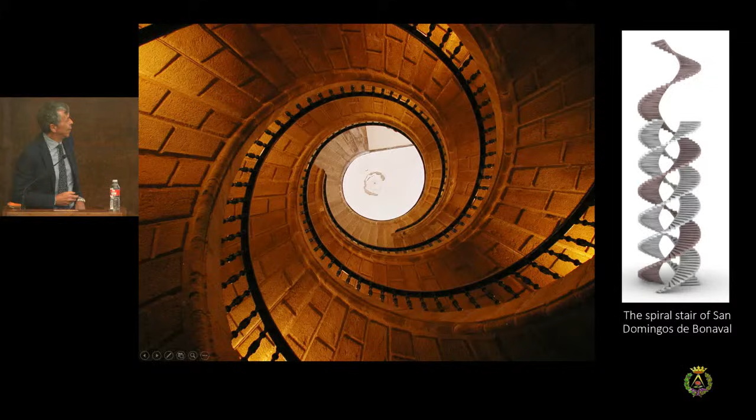This is an example that was brought to my attention by Santiago when we first met in this meeting in 2013. With this very generous style that everybody knows, he shared his ideas and expertise on this stair. This is the stair of San Domingos de Bonaval, a three-coil stair made of monolithic treads of granite, touching only at the inside. This is an open well stair, built into the wall, and the pieces touch only at this kind of rib.

This is Santiago in Anagni when we talked about this. After that, a group of people took this problem as a challenge. I had to admit, at that time I was an expert, a professor of structural mechanics, but none of the models I used could explain the equilibrium of this stair. This was taken up by many friends and scientists who applied different methods: 1D continuum models, funicular things, discrete elements, kinematics, equilibrium, and especially the last one combines all these methods.

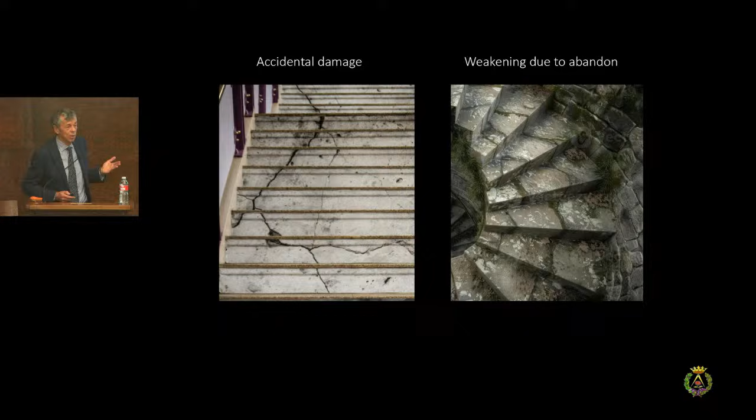Of course, sometimes these stairs can show signs of discomfort, because maybe they are abandoned or damaged by something falling. In that case, you have to do something. But if there is no such problem, there is no reason to intervene. These are two examples of overreaction, something that was done, I think unnecessarily, just because they didn't know how to explain it with their models.

The model I used to compute this stair very easily is based on the work of Heyman, on the model of Heyman. Actually, the book of Heyman from '95 changed my life, because in my first life I was kind of a mathematician, and I worked on this unilateral model, which I think is the only good one for masonry, but from the mathematical point of view, with mathematicians, also with the Neapolitan school, Di Pasquale, Mario Como, who is here. But I discovered this can be useful for the real world.

And the model is very simple: there is no tensile stress, the stones interact only by contact, there is no tensile stress, and very important, there is no sliding. The intuition of Jacques Heyman was that you can use limit analysis for this kind of model.

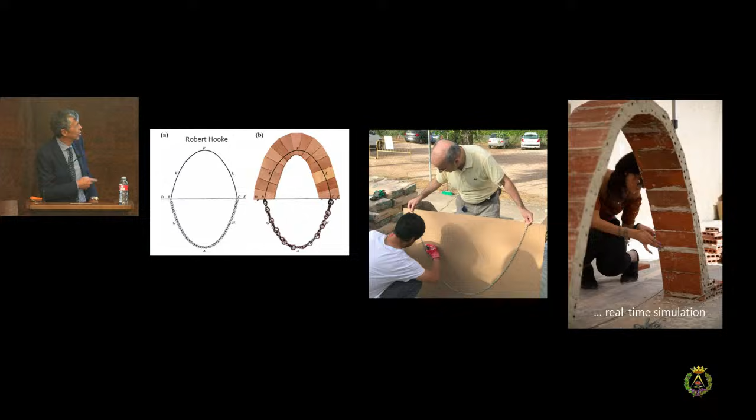The simplest example where you can see the theory of Heyman at work is this arch. If you take a chain, the equilibrium of this chain is ruled by the same kind of equilibrium as an arch, so you just have to invert it. This intuition gives you the possibility to make real-time simulations of an arch. This is the summer school we have organized since 2018, where we also build something — here a student is building an arch based on this model.

No? You can approach this with graphical statics. This was the old way in which they used to assess masonry structure, so with a discrete approach. But you can also use a continuum approach.

That is the famous catenary equation. You describe this curve as a function of x. And yes, I use f instead of y, but it is just because I'm a mathematician. And the equation is very easy. The thrust times the second derivative of the shape, second derivative is the curvature, is equal to the load. This load is defined per projection.

And if you try to write that with the length, you have a square root, but if you have the load that is defined per projection, this is very easy, it is a constant. So you can use also the continuum. I prefer the continuum.

And you will see that there are two models in which you can explain the equilibrium of the stair. And the first approach is discrete. I mean, you can think of the stair as made of many pieces. And the first solution is a solution proposed by Heyman. And actually, I've seen the proofs of this new edition of the book, and there is also this analysis.

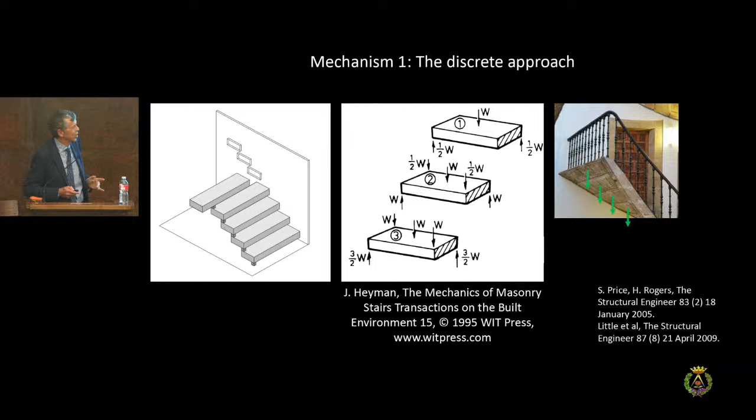There are also some other papers quoted there by English engineers that understand what these stairs are. And the idea is very simple: each step, say step n, takes all the load coming from the above part of the stair, and then there is the weight of the step. And these forces you have to balance.

So the balance is made like this. You can balance through the beam, that is the step, the load with these two forces. And then you can balance with another force that is opposite to the blue force. So this is a way that you can make equilibrium.

Of course, you create a moment. This moment must be taken by the socket. So the socket cannot rotate, so it can take that moment. And so you can compute the moment. This moment is just the load times the length of the step.

What is the problem? When you go down, this moment grows, because all the weight above grows linearly. So at some point Jacques Heyman said that you cannot bear the shear stresses that you have after maybe 20 or 30 steps. It depends on the loads, it depends on the material, and so on.

This is the typical step. This is the same picture. And this is the relation. The moment is the load that is transferred to the rib, that is 1/2 of W in this case, because the step is rectangular. And then you have to multiply for all the steps that are above, that are n-1. And then there is the moment, that is the force times the distance. So it is quite easy.

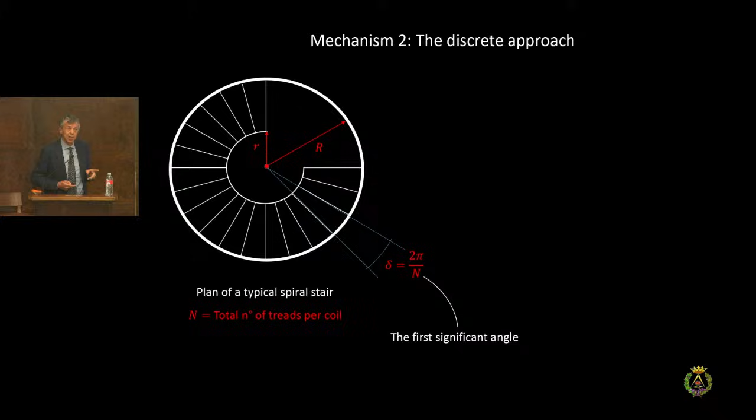And the first angle is the step angle. That is the whole 2 pi divided by the number of steps. Here there are 42 steps for each coil and a total of 126 in the 3 coils. So this is the first angle.

So what can you do? You do the same you did before. You transfer the load at the wall, at the rib let's say, and you take the force at the wall with the wall. And the other one you can think you can take with this kind of rib. So you have this strut made of three bars. They are in space, so they are numbered. 1, 2 is the rib, and 3 is the force inside the rib, inside the tread.

So what you do to handle this kind of 3D strange equilibrium, the mantra is working with the projection. It was invented by Maxwell, maybe, or Rankine, I don't know, and also John and Philip developed a method called TNA, Thrust Network Analysis, that is based on working on the projection and on the duality between the form and force diagram.

Okay, so this is the view from top, and then you have these 3 bars, and you have the forces. For those who know this play of form and force diagrams, this is quite easy. I will not go into details because we have no time to explain this, but it's kind of easy.

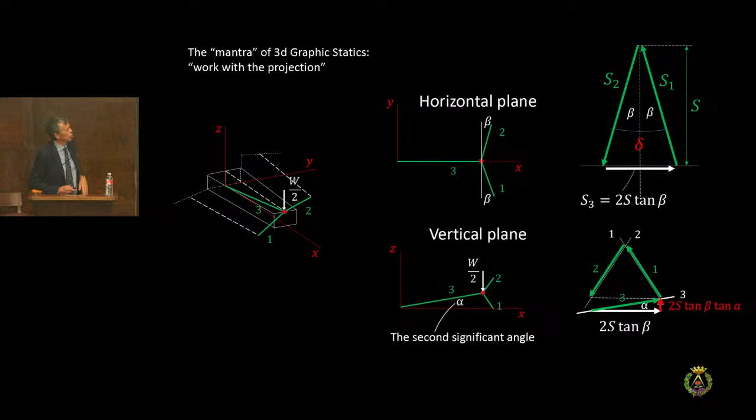And then you go in the vertical plane, and working in the vertical plane, you put the force there. That is the force, the weight of the step. And then you can do equilibrium. You know the direction of it, so you do this. This is kind of standard, no?

And then what you get? In the end, you get that you want to close this polygon. And then to close the polygon, you have to amplify the S until everything is closed. And in the end, what you discover is that S is the projection of the axial force into the rib.

And this is the weight of the tread divided by this strange thing. This can be easier because delta and alpha are small angles, so you can write this way. You can say that tangent alpha is alpha. You can say that tangent delta over 2 is delta over 2.

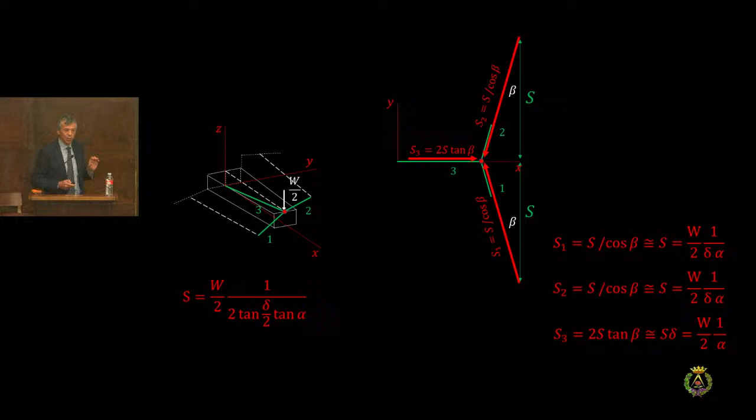And in the end, you just get that S is... here is S1 and S2. S1 and S2 are the vertical component, the Y component of the forces into the rib. These are W divided by 2, that is the force transferred to the rib by the step, divided by delta and divided by alpha. So they can be not so small, no?

Because delta and alpha can be 0.1 or something 0.15, it depends. So it is quite high, but it's not so high. And we will make the number.

So, of course, the second mechanism is... yes, I did something different here because, you know, W over 2 is the weight that the step transferred to the rib. But if you have a different step, you maybe have a different value. You call this value QB, that is just the force that is transferred to the rib. And so I use this relation instead of the first one because we will use that for our case.

And what is the problem with the second mechanism? The second mechanism works with this constant force into the rib, and this goes all the way to the top. And sometimes at the top you don't have any possibility to balance this force, no? This constant force, it's like a thrust. It's a strange thrust, because usually when you have the thrust, at the end, the slope is opposite, so they cancel. They sum up.

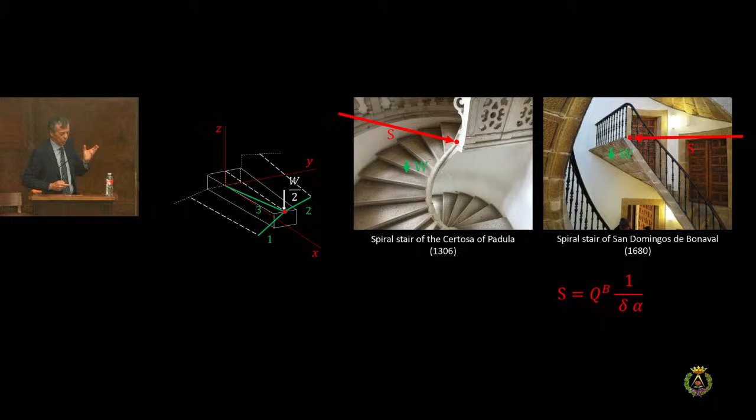They don't cancel. So in the end, you have to come up with something that combines mechanism 1 and mechanism 2. And I will do this with continuum. So I brought some props in such a way that it is easier to understand what I will do. It is very easy. Of course, we don't have time to go into details, but it's quite easy to work with continuum. What is our continuum?

It is a very strange rib, because we have a rib there. This is a physical rib. And this, I call it a non-standard beam, because it is a beam with no moments. If you have a beam, the beam is defined by the fact that it is one-dimensional and can transmit bending.

And this, in fact, it is not like this. It's more like this one, because it cannot only transfer — of course, you have to change the sign — no? You can only pull this, and this one can only be compressed. But what is the difference? That there are these moments of the steps.

So when you write the equations, many times they say don't write equations, but these equations are very, very simple. So you describe, think that the rib is straight, because this fact does not depend on the fact that the rib is curved in the horizontal plane.

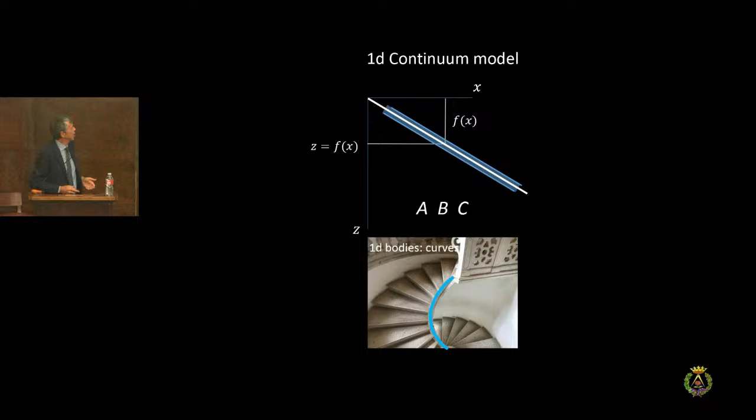Take the rib, describe it the same way as the catenary. You see that the rib can be curved, but now we think that it's straight. And then you assume that it can take these forces: vertical forces, horizontal forces, and moments. These moments come from the step, because the step cannot rotate. These are the external forces. Then you have internal forces. If you have a beam, you can have 3 internal forces: horizontal, vertical, and a moment.

When you do beam theory, you decompose the forces into axial and transverse. You have the shear, but here it's better to decompose them horizontally and vertically. Next you have to define your equations. These are the standard equations of a beam, which we teach in the first year of engineering, and architecture also. You take a piece and make the balance of the forces, and you come up with these equations. You cannot see the equations right now—maybe it is done by Santiago.

You make equations. Okay, tell me when my time is over. I'm almost there, okay. So,

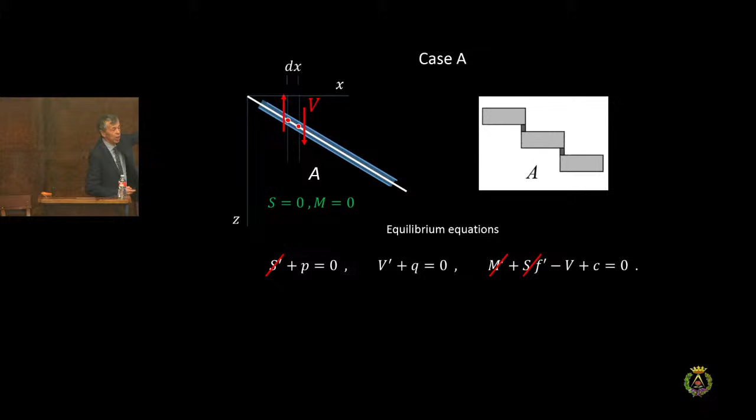this is the balance of the horizontal forces, this is the balance of the vertical forces, this is the force coming from the step, and this is the balance of moments. What is the problem? This beam does not carry moments, and neither horizontal forces if the connection is like that. So you have to cancel those, and you come up with equations that are quite easy.

And then you can compute this moment. This small c is the distributed moment along the rib, so if you want to compute the resultant, you have to multiply by the length of the step, of course. But anyway, you compute it this way, and you see that the formula, when the load is constant, is linear. This gives you the idea of Heyman's linear growth. This is the same as Heyman, but done with the continuum.

And then you take the other case, the case of contact, where you can transfer through friction, or with a rebate it's much better, you can transmit a force that is axial. How do you understand that it's axial? You write the same equation and say that m is 0. Of course, s must be negative, because you have only compression. So you have to cancel this.

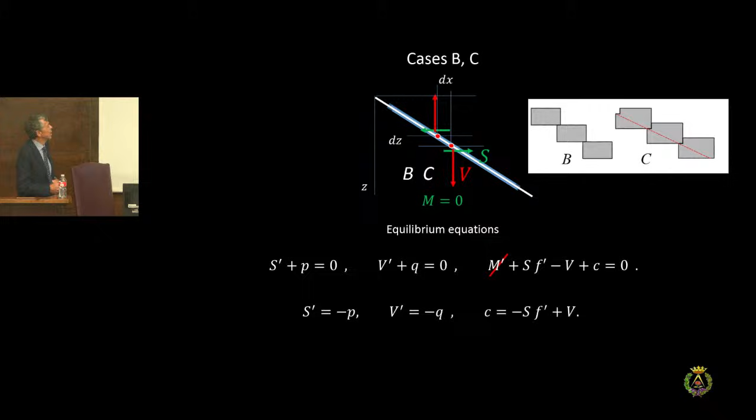If you want to study the solution not of Heyman's but of pure compression, you exclude the c, so you come up with this equation. You discover that the vertical force is connected to the horizontal. And so you construct the equation the same way as the catenary equation. You have this equation, and this term, in this case, should be 0, because you see this is straight, so the second derivative is 0. So you go on,

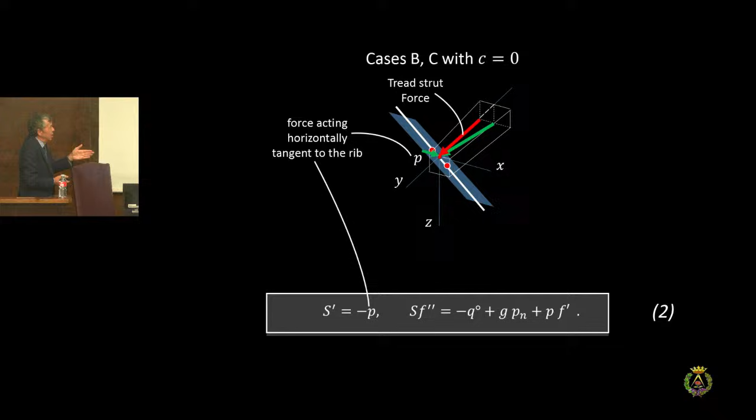you want to take that force with the strut element. You have a vertical component. This vertical component has to balance the load that is transferred to the rib. This is an effect that comes when you have a horizontal also—sometimes you don't have the horizontal, only vertical. This you have to cancel because this is straight. There is also this force that is important: an horizontal force that gives you the possibility to change S, not to have an S that is constant. The problem was that the S cannot go all the way to the top because there is nothing. So if you want it to vary, you have to assume there is this small p, meaning the strut element is a little tilted.

So you need this, of course. Then you have to check at the end. And the final thing is to understand that if you want to balance this force coming from the step, you need something curved. So you have to assume that the rib is curved. And when the rib is curved, the equilibrium of this force is made with,

yes, this equation—it is very similar to the catenary equation. It says that the load you put transverse to this rib in the plane is balanced by the product of the curvature, rho, 1 over r in this case, times the stress in the rib, the projected stress. So you have 3 equations: the first 2 are the same that we wrote for the straight rib. This derivative is the derivative with respect to S, the length along the rib, and this is the other equation. So in 3D, you need to balance transversely.

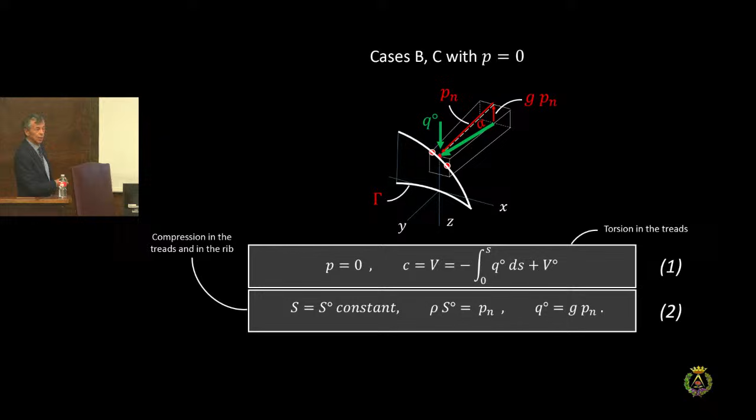And then, of course, you want to recover what you did with the constant. You can do this very fast. You can check the case in which the horizontal load P is 0, in which case you get constant S—that is the thing you didn't want, but just to check. And then you compare the solutions with those of the discrete case, and they are, of course, the same.

It's the translation of this equation into continuous terms. But to combine them it's better to work with the continuum. So I combine them, using this equation, and you see that here there can be a combination of moment, of this C moment, and of the thrust in the rib, compression and torsion. You can combine them linearly as you wish.

And you can think that the load that goes to the rib is decomposed into two parts. One part goes to the torsion, and the other one goes to the compression. These are called Q1 and Q2.

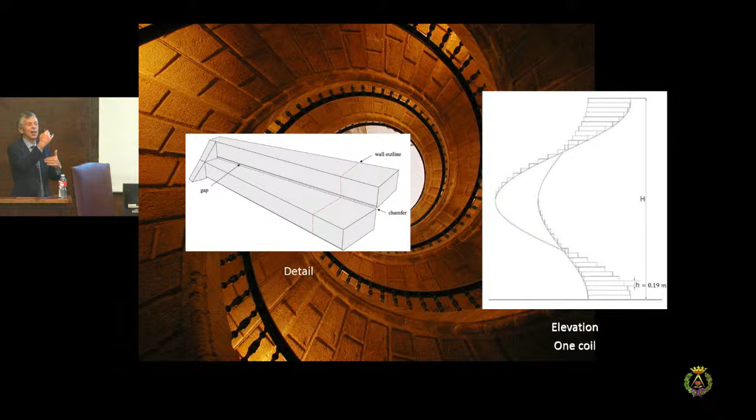And then we study finally the stair. This is the stair. You see that there is a gap, and at the corner there is a chamfer. This is the detail of the stair. And this is one coil. The height of the step is 0.19—there was a reason, because there are 3 coils, and you need some height, otherwise you don't get there.

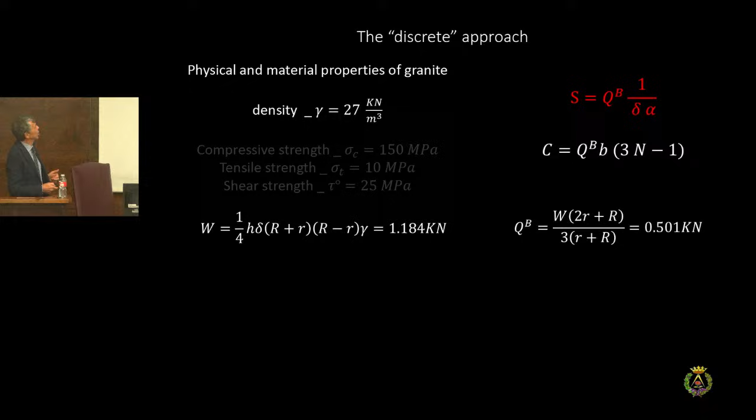So now we have the two solutions, and we can combine them. First, I want to skip this because this is the constant solution—we don't want to see the constant solution, we want to see directly the combined solution.

So you take your rib, you can develop it in a plane. So this is the description of the rib. These are the dimensions, the real dimensions. 3h is the total height, 3 capital H is the total, 24 meters. And you need these numbers to put in your equations.

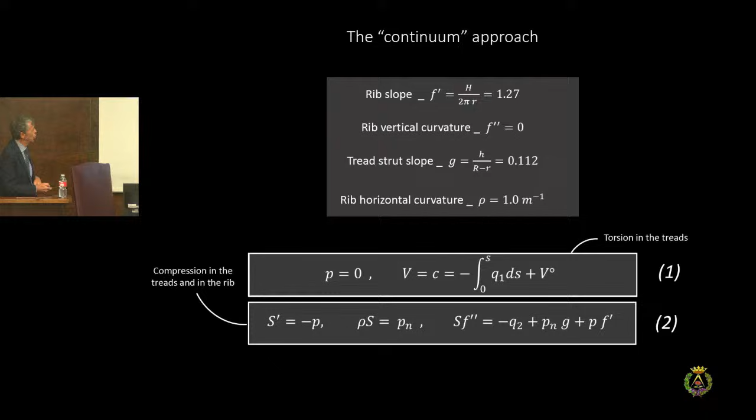Then you take the two equations, using the pure Heyman solution and the pure compression solution. And how do you combine them? Of course, here are the boundary conditions—we like to write the boundary conditions. The boundary conditions are that at the top, the force is 0.

And then to find S, you have to solve this very easy ordinary differential equation. Instead, the value of C and of V is explicit—it's just the sum, it's just the same formula of Heyman. So this one is not explicit, but you can solve it, and the solution is analytic. So it is general, you can solve it anyway.

So how can you distribute? The most sensible way is to distribute with an exponential. So you start with everything in torsion, and then at some point it all becomes compression. You need this because you don't want the P force to change from the beginning—that's not good. So by changing the exponent in this formula, you get different transitions, and this is the transition that I chose. If you take k equal 0, you get the solution of Heyman. If you take k equal 2, you have a drop of 5 times the moment, and this is the one we use. This is done step by step.

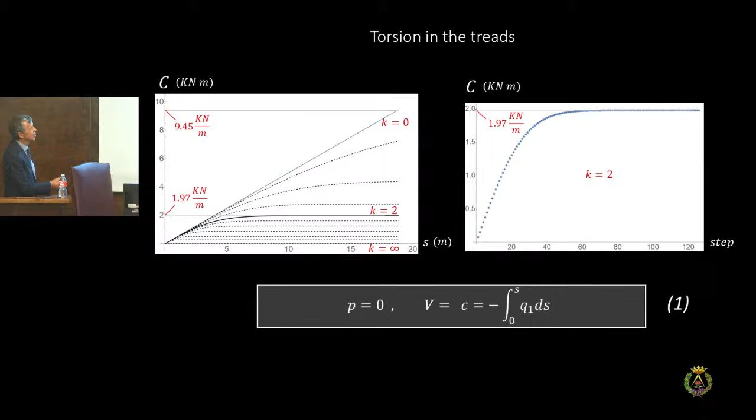It's the moment step by step. So you can compute the force at the moment. You can compute the tangential stress, the shear stress, and this stress is very low compared to the limit.

You can say, well, but there could be live load. Okay, but you have to multiply by 1 times 2, maybe 1 times 1.1, 1.2, and it is still below the limit. And what about the force into the rib, the S force?

The S force, of course, also this can be different depending on the choice of this exponent, but with k equal 2 you get this one. So this is the profile of your axial stress. It starts from 0 that you want, and then it gets to this value that is the maximum. So you take the maximum and you try to compute the stress.

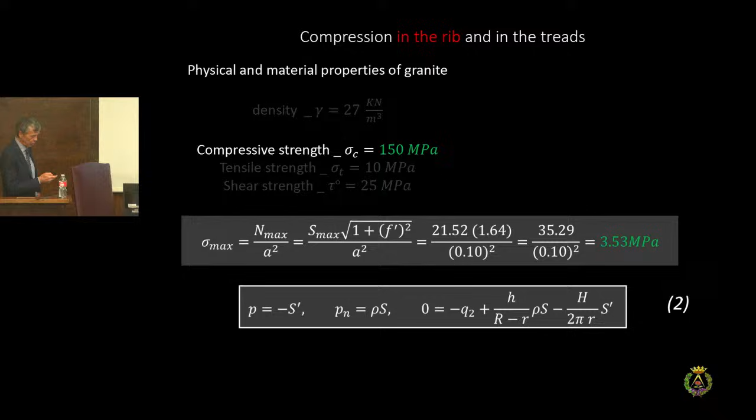This is very, very, very low, no? 3.53. And okay, of course, this is the part that forces us to be careful, because you don't want to have this small p from the beginning.

And actually, with k equal 2, you have the maximum of this that is at the 40.

I'm over, no? It's over. The time is over. Oh, okay. Good. I ran too much.

I can relax. Okay. And so the maximum of this force, this is the force, T means tangential. And I'm sorry that I changed the name, because this Sn, it was called S3, it was the force into the strut, into the step. To the N, because it's normal to the rib. This is tangent to the rib. This you want it, this is nice.

This is not nice. If you change the value of K, you get this, for example, no? You get, it is not very large, this P, no? The effect of 36 kilograms, okay, but it is something, no?

If you have the maximum in 10 steps, you don't like it. If it is 48, it can be taken by the stair. So this is the idea.

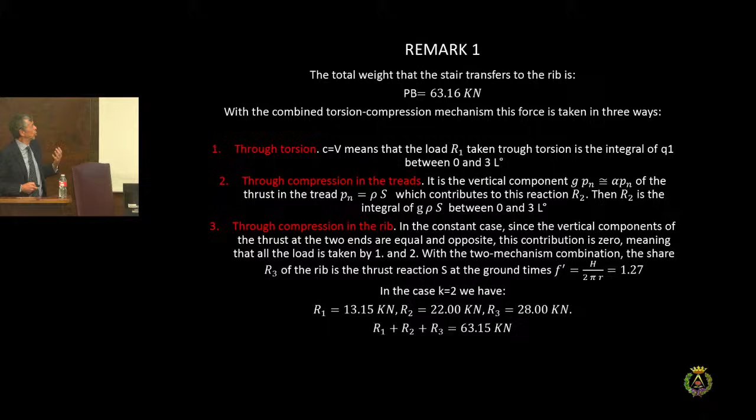Of course, there is a remark on the live load. You can put, sometimes they ask you to change destination. You have to put a very large load. And if you put the usual load that they put on a stair, that is this one, you have just to amplify, to multiply your result by 2.10, and it's still below the limits.

Yes, this tau max remains below the limits. It is close to the limits, but it's below the limit.

And these are the final conclusion, because there is always this question: we found a regime for the stair that was good, but why the stair should take it? The reason is the safety or mobility analysis. And in this case, you know, it's due to some effects that sometimes you don't consider.

The fact that the part that is built into the wall is not perfect. It can move. It can give a little. It is not stiff. And so the first message is do not stiffen. Because if you stiffen, it is worse. Because if it is not stiffened, it can go to this state.

The important part is that you find this state, and the stair will go to this state in a kind of ductile way.

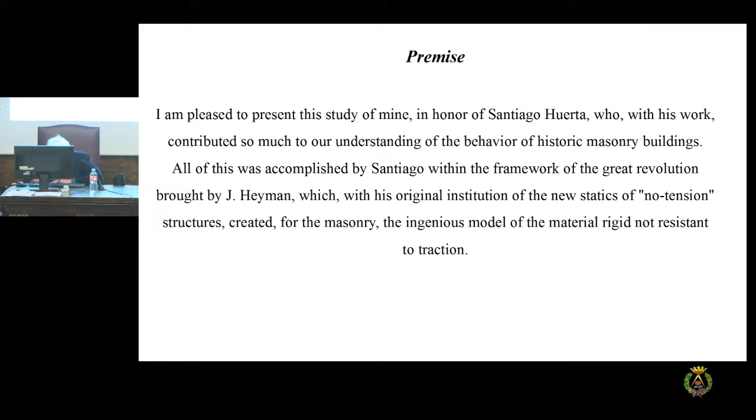The work I present here, which for the most part built on some previous studies on the topic conducted by myself and my young colleagues, Coccia and Di Carlo of University of Tor Vergata, moves within this context and concerns the extension from the statics to the seismic dynamics of this new modeling of the behavior of masonry construction.

The need for a theory of seismic dynamics of masonry structures is clearly acute. Currently, in technical practice, only procedures based on criteria generally used for reinforced concrete structures are applied. The same characterization of the dynamic collapse, which presents completely different aspects from those relating to the static collapse, has not yet been defined.

The aim of this work is, first of all, the formulation in the context of the Heyman model of the concept of dynamic collapse, together with the research of resistance required by masonry structures to support the expected seismic action.

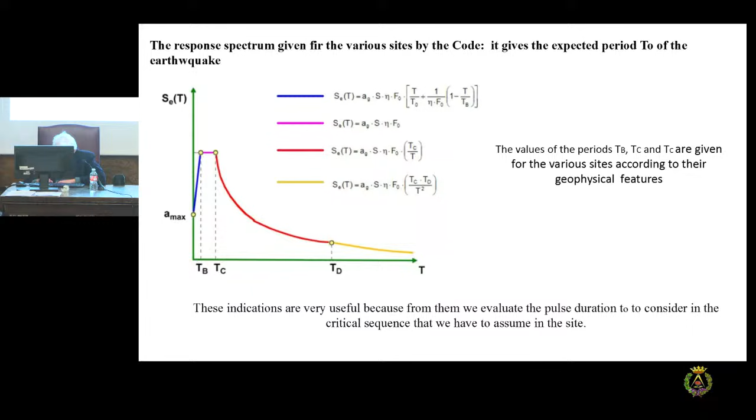What essential aspects do we have to take into account to study the seismic response of no-tension structures? Two important things: the weight, together with the geometry, constitute the resistant resource of the masonry structures.

The rigid prismatic column rocking on a rigid plane with friction represents the archetype of masonry no-tension structures. The alternating detachment of the column from its base simulates the rocking of masonry structures, following in the oscillation the opening and closing of the cracks. We see the movement according to the no-tension theory in the plane of the structures.

An important remark: if we consider, for sake of simplicity, the oscillation of the column, but also the oscillation of an arch in its plane, we recognize that there does not exist a proper period of oscillation for no-tension structures. Why? Because the impact that occurs during any inversion of the motion spends energy. In a simple oscillation, we see that the period changes rapidly, and no fixed period exists. This means that the whole framework of the response spectrum cannot apply to study the seismic response of no-tension structures.

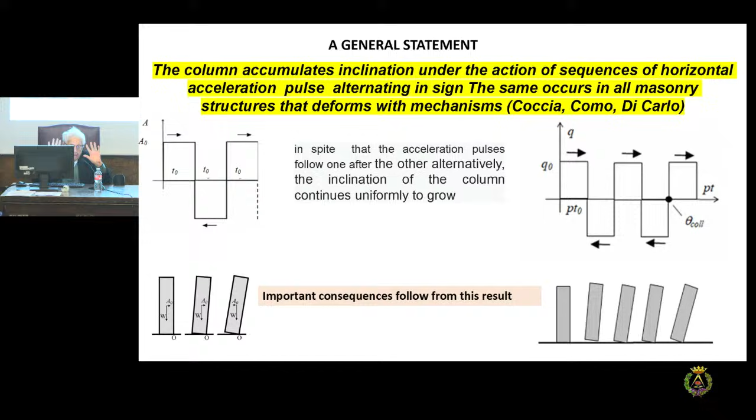This effect increases when considering a sequence with a greater number of pulses. This applies not just to the column but to any structure that moves sideways without going back, without impact. What happens therefore? First of all, we asked ourselves whether these results that I explained to you are correct.

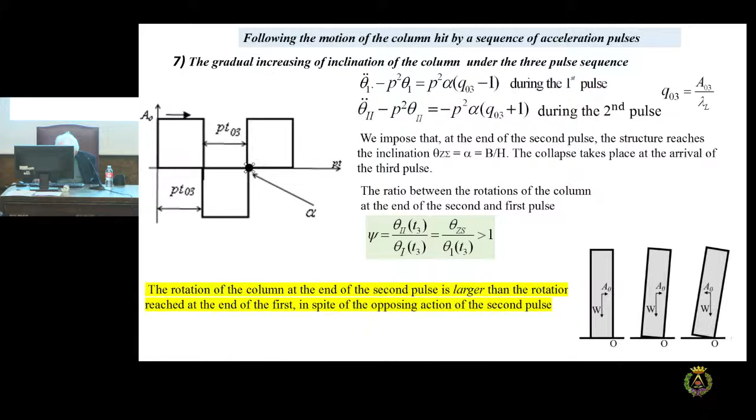Considering the sequence, we recognize that as the number of pulses increases, the Q factor, the limit collapse factor, becomes smaller.

What do we have to do? We have to look for the minimum, the smaller values of the Q factor able to destroy the structures. And we can do that.

We can at the same time represent the Q factor as a function of the interval of the pulse, and we obtain the limit curve. By increasing the number of pulses, the limit curve becomes nearer and nearer to the others, so that we can define an asymptotic curve on which all the various curves accumulate.

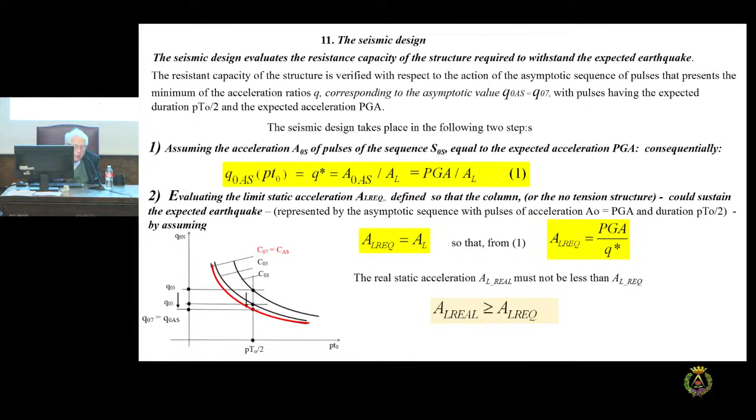With the experimental numerical test, we see that after just a few impulses, seven pulses, you reach more or less the asymptotic curve. According to that, we can immediately obtain the main result: the static limit strength required for the structure, so that if hit by the sequence corresponding to the minimum intensity of the Q ratio, which is the most destructive property of the sequence, the structure must be able to support this action.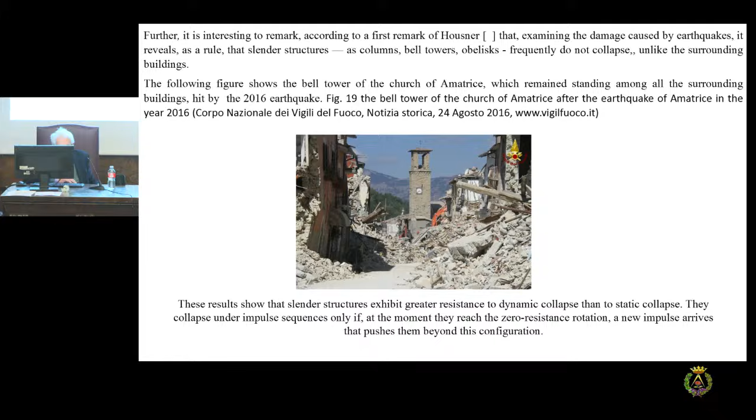I want only to say there is the bibliography, with 3-4 papers of mine and my young colleague that have been published on earthquake engineering, reporting some of the things I have explained to you, together with an application to walls and forces orthogonal to their plane. That is one of the more important problems for the defense of masonry construction during an earthquake. We have to remember the destruction of Messina—the famous street, I don't remember the name—in which all the walls of buildings collapsed outward, and also the application to the masonry arch, hit by horizontal pulse in the plane of the arch. Okay? Okay.

Thank you, Professor. Thank you. And I'm... excuse me, take a minute.

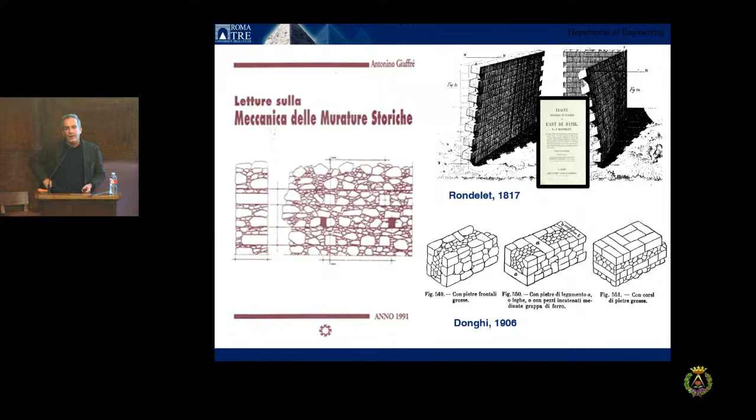In particular, his great contribution was to clearly outline the importance of the quality of masonry construction, and how the effective capacity of masonry structures under lateral loads decreases with decreasing level of bonding between the two leaves of the masonry structure.

This aspect had a very strong influence on earthquake engineering of historic structures, as we can also see from many earthquakes, because often what happens is that the wall is damaged after disaggregation of the external leaf, which detaches from the inner side of the wall and fails outward. This is one of the reasons for the tremendous level of damage that happened after many earthquakes, such as the Amatrice earthquake in 2016, but not only in Italy—also in other historical contexts like Antakya in Turkey in the 2023 earthquake.

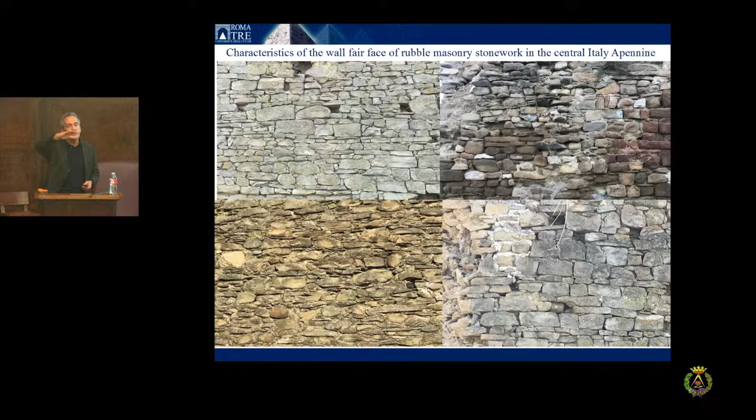One of the difficulties in studying this very dramatic behavior of masonry structure is to understand and read the quality of masonry, because sometimes from the external leaf you don't understand that the quality is so poor. You see horizontal tiers, the blocks put in a reasonable manner, but when you see what happened after the earthquake, you understand clearly that the internal structure is very poor, and the wall is lacking bonding elements between the different leaves.

What we have done in this context was possible thanks to the availability of the municipality of Accumoli, one of the municipalities struck by the earthquake in 2016, which allowed us to take the stones from a building that collapsed after the earthquake and use them to build a full-scale model to test on a shaking table.

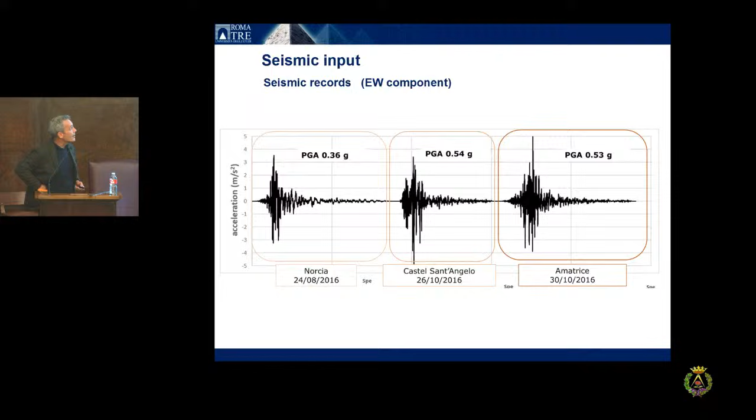To this end, we designed a steel frame to allow the upper part of the wall to move in the same manner as the base of the wall under the shaking table. We tested the behavior of this wall with some real earthquakes taken from the registration of the national accelerometric network. These are the three earthquakes we applied to the shaking table, applying them at subsequent increasing levels of acceleration up to the complete failure of the specimen.

I don't know how to enter this. I think we cannot see the failure video, unfortunately. I don't know why.

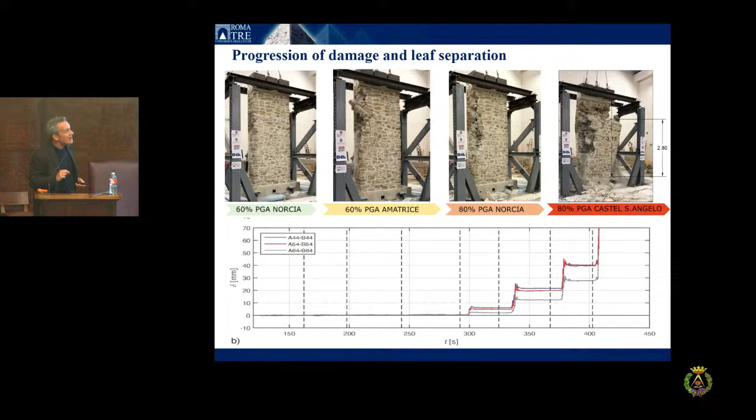The reproduction of this failure was very interesting to understand better the behavior of historic buildings, and to understand how important the progressive separation between the leaves is, and when this detachment becomes so high that the stability of the wall is no longer guaranteed, helping us understand the progression of damage up to the out-of-plane capacity of the masonry wall.

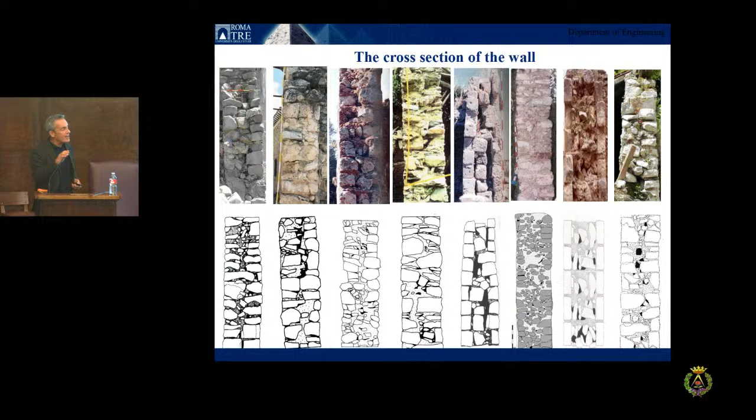Starting from this activity, we tried to expand this research to other wall sections taken from different surveys, analyzing their behavior under both static and dynamic loading, and coming up with an overall behavior of the wall depending on its internal morphology. This outlines the differences between the classical rigid body out-of-plane overturning presented by Professor Como in his talk, and the effective wall section made of stones interacting in different leaves. This was the starting point of further research devoted to understanding the detachment of this wall close to the corner.

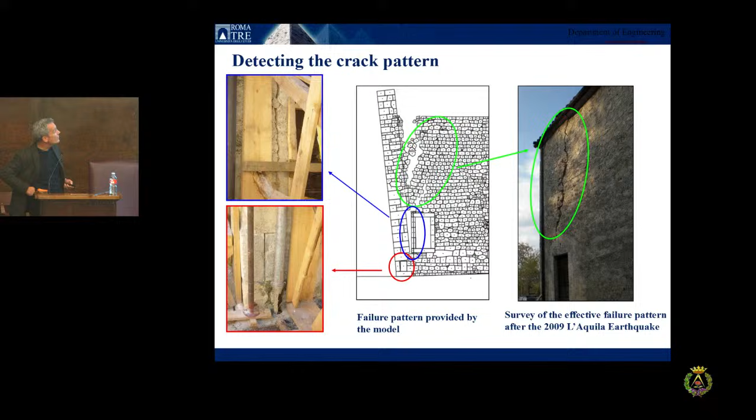Starting by modeling this—it's not working, this one, no, okay, it's not a problem—we also verified the effective capacity of this tool to reproduce the effective failure of masonry structure hit by earthquake.

This becomes a very interesting tool, especially combined with digital survey: you digitally survey the face of masonry, recognize the important texture of blocks, such as those shown in red in the slide, which are important in terms of stability, while reproducing the other blocks in a more rough manner, then simulate the effective behavior under earthquake. Unfortunately the video is not working, but this simulates the effective detachment of the wall from the rest of the structure, allowing us to analyze the effective seismic capacity of these buildings.

From this activity, our current challenge is to do this automatically, starting from the digital survey of the building, then identifying the joints of the masonry structure through a marker-based watershed segmentation—an automatic algorithm that rebuilds the effective pattern of block masonry—and then performing structural analysis depending on the morphology of the block section to get a final estimate of the earthquake capacity of the structure. This is one of our current research activities, always brought together with great interest and passion for monuments, as we are effectively involved in many structural assessments of existing structures. Thank you very much for your attention.

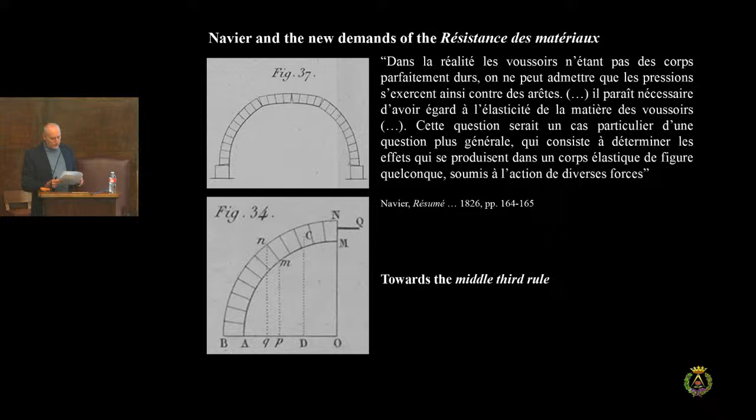As mentioned above, Saint-Venant adopted Navier's discussion. However, Navier's two-sided analysis must have seemed very confusing and unsatisfactory to him. The winning approach for overcoming this uncertain and confusing situation was found by Saint-Venant in the contents of a note, sur l'équilibre des voûtes en berceau, that Méry sent him in December 1837, probably at Saint-Venant's request.

Like Navier, Méry develops the theory of vaults from two distinct points of view. The first is the traditional collapse analysis, which, in Méry's words, concerns the so-called équilibre mathématique in the case of infinite compressive strength. In this sense, nothing really new, except for the use of an innovative graphical tool, the line of thrust, to replace the cumbersome analytical methods used until then. Here we find an example of équilibre mathématique, and you see the line of thrust which touches the arch, the intrados and the extrados of the arch, in order to produce collapse of the arch.

Alongside this, like Navier, Méry is also interested in studying the condition of the arch dans la pratique, that is, taking into account the actual mechanical properties of masonry. To do this, he observes that the crushing of the masonry can be avoided if the line of thrust is contained within a reduced thickness of the arch, bounded by the dotted lines in the figures, and defined by the actual value of the compressive strength. In this way, says Méry, the problem of the stability of vaults is reduced to that of équilibre mathématique.

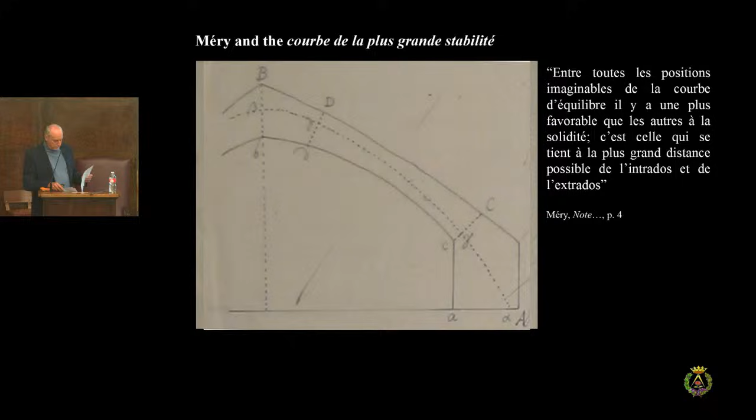Subsequently, attempting to interpret the effects of decentering, he concludes that the actual position of a thrust line is generally intermediate between that of maximum stability and that of minimum thrust. So you see in the line beta prime, alpha prime, the line of minimum thrust, and in the line beta alpha, the position that, according to Méry, the line of thrust tends to assume.

In February 1838, Saint-Venant replied to Méry with a beautiful and long letter of 14 pages that is a masterpiece of pertinent observations and valuable suggestions for improving the final version of a note. The final version of the note is the well-known Mémoire sur l'équilibre de voûte en berceau, published in the Annales des Ponts et Chaussées in 1840.

Among these considerations, what is of interest here is Saint-Venant's far-sighted interpretation of Méry's criterion, recognizing in it a value that Méry himself had not realized because he was too interested in searching for the probable thrust line among the infinite ones in a stable arch.

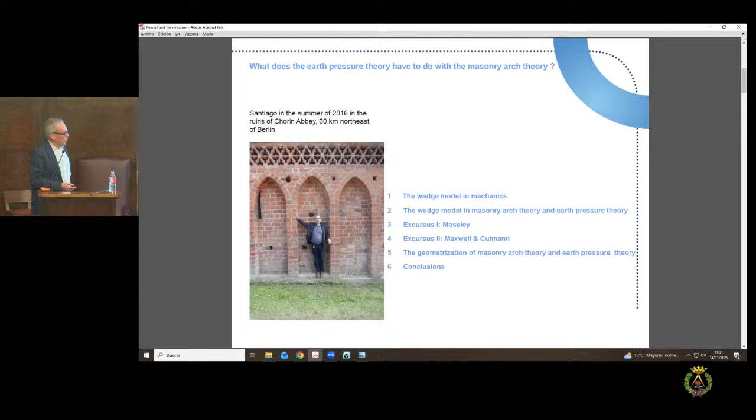Dear Santiago, dear friends and colleagues, in the next 10 slides I would like to answer my question. It concerns the common basis of masonry arch and earth pressure theory, which, in short, deals with the geometry of equilibrium in the context of graphostatics. I will elaborate on this thesis in the following 6 points.

Heron of Alexandria, who worked at the Museum of Alexandria, discussed the 5 simple machines in his work Barulcon: lever, axle in a wheel, pulley, screw, and wedge.

These machines run like a thread through Guidobaldo del Monte's Mechanicorum Liber, the German edition of which was published by Daniel Mögling in 1629. Del Monte and Mögling analyzed the 5 simple machines using a type of geometric protomechanics.

The entire work of Del Monte and Mögling is permeated by the supremacy of the law of the lever. In this respect, both authors still measure themselves against the authorities of antiquity, but they declared war on them and allowed themselves to be guided by Archimedean principles. They were imbued with that spirit of calculability which strove for exact observation and reflection of processes.

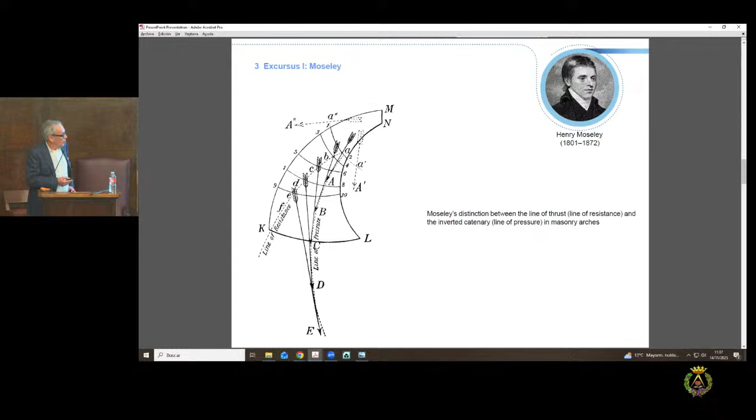But that's only one side of the coin. The other side of the coin is the discovery of the duality of the funicular polygon and the polygon of forces on the mathematical basis of projective geometry, which Maxwell and Culmann formulated independently of each other.

This is only an illustration. For further reading, you must use a new book from Bill Baker and McRobie from Cambridge. One author is here, John Ochsendorf.

The starting point for Culmann's graphische Statik in 1866 was a theory of retaining walls. So it was not beam theory, arch theory, framework theory, or the theory of continuous beam that advanced to become the reference theory of graphical statics, but rather earth pressure theory.

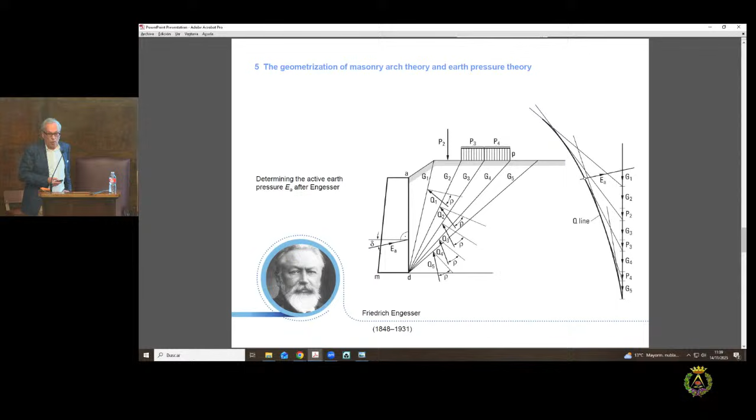In summary, the following 5 conclusions can be drawn. First, the theory of the friction wedge was still the basis of both earth pressure and masonry arch theory in the initial phase of structural theory. Second, Coulomb's earth pressure and masonry arch theory only specifies limit equilibria, obtained mathematically on the basis of extreme value calculation in differential calculus.

Third, Maxwell's and Moseley's discovery of the difference between the line of resistance and the line of pressure is a necessary condition for the development of earth pressure theory in the form of masonry arch theory. Fourth, a sufficient condition for this is the discovery of the duality between the funicular polygon and the polygon of forces by Maxwell and Culmann.

And fifth, Engesser completed the geometric earth pressure theory based on the conditions specified in the third and fourth conclusions.

That's the last slide. I hope I've been able to answer the above question. If this is not the case, please feel free to contact our friend Santiago, to whom we wish all the best.

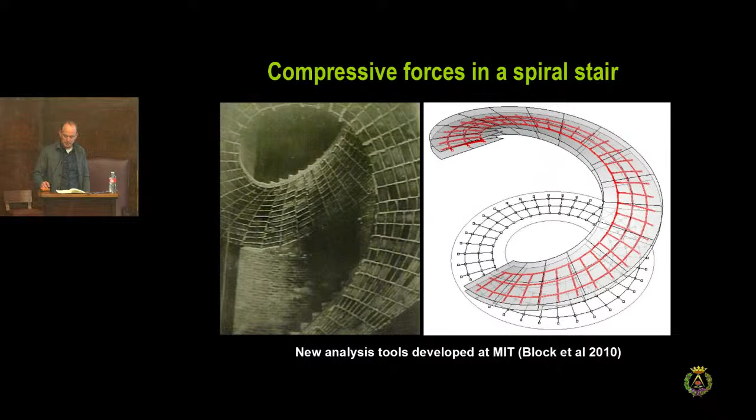So I'll speak briefly about 2 significant Italian domes. The Pantheon in Rome is, of course, well known to all of us as one of the greatest structures of all time. I moved to Rome and was lucky to be director of the American Academy, just a few decades too late, after there were many more lawyers in the world.

Because in the 1970s, the American Academy could go on top, and now you can truly understand the size of the oculus when you are sitting there on the edge. But Gianmarco, we are not allowed to do this anymore. So, but I still enjoyed my time in Rome, 4 anni a Roma, and I'm always fascinated by this structure.

Santiago and others have shown us that Roman dome design was, of course, proportional design based on principles of stability, that the scale does not influence the stability. In the static condition—Professor Como, of course, in dynamics, the scale has an impact because of the inertia. I was fortunate to be at Cambridge working with Professor Jacques Heyman and learning about the cracks that occur in domes as the supports move outward.

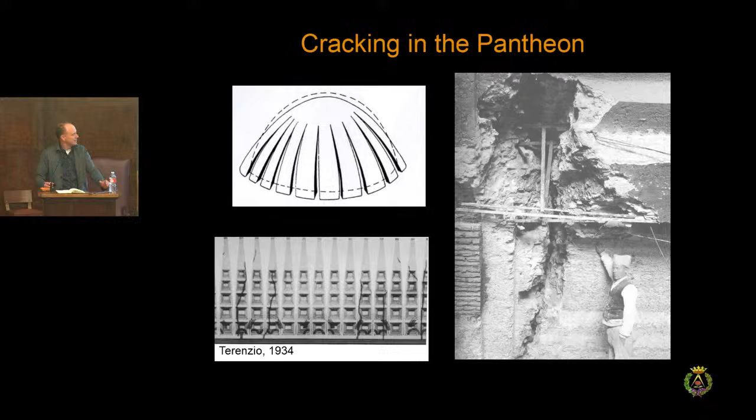The cracking in the Pantheon, we all know, has not been seen for decades, but the next even moderate earthquake in Rome will reopen the cracks. Obviously, they are there, they are sleeping, and we will see cracks opening. So we are always thinking about proving the equilibrium, both in the static condition of a cracked structure, but also in the dynamic condition.

My students and I have been working on this computationally, but also experimentally, with 3D printed models where we have no tension, and we are studying the stability in 3 dimensions. We recently built a 1:100 scale model of the Pantheon. This is the one new result I want to show for the Pantheon, which is that the dome is stable during construction.

Exactly like Brunelleschi's dome in Florence, you can build it in rings and you don't need heavy formwork to support the concrete, which is almost like masonry. It's placed by hand. This, by the way, is not published yet, but we're working to publish it now. And in fact, if you see the half domes at Trajan's Markets, another Roman dome,

you see concentric lines of masonry being laid up in layers. And so I present to you that the Pantheon in Rome could easily have been built with some very light internal scaffolding to define geometry and the coffers, but structurally it was stable in thick layers that were laid up over many months as it progressed. And maybe the oculus stopped there because to keep going horizontally was more challenging. So something for us to think about.

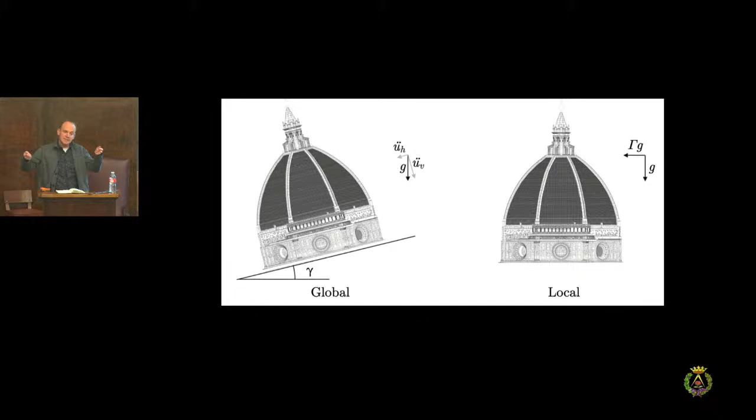The simple premise is, if you tilt the dome, what is the minimum acceleration that would cause collapse? Como, I believe, was the first author to point out that depending on where you take your opposing slice, you can have a weak direction or a stronger direction, with a slightly different geometry. Como had even proposed this lovely plan drawing showing that the minimum thrust varies according to where you take the slice. So we give homage to Santiago Huerta, but also to Professor Como.

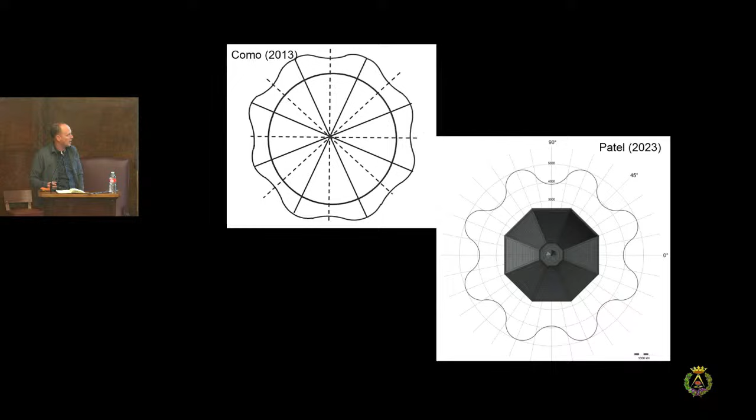We have studied this and added a little more detail about the minimum thrust in each direction and how it varies around the dome. But more importantly, we are interested in when you tilt the dome in Florence, how far can you go before you get to a minimum acceleration? The key number here is 0.15 g and 0.16 g, slightly different, but a modest amount of tilt when you consider it as a kind of pseudo 2D slice.

But then we make a 3D printed model, and we tilt the 3D printed model. This is a recent thesis by Shaili Patel. All of this is work with my students, of course. There is no mystery that Brunelleschi's dome is stable as you build in concentric rings, but we prove it with the model because you have a circle in plan and compression of hoop stress.

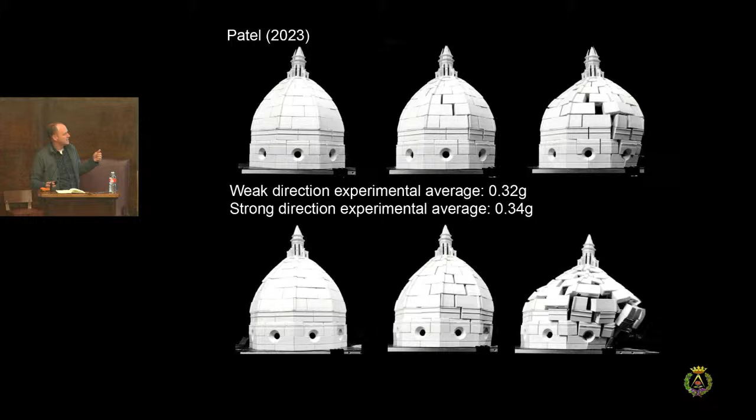But on the weak direction, when we tilt it, we get all the way up to 0.32 g, more than double the 2D slice result. So you really have a three-dimensional behavior which is developing as you tilt the dome. And in the strong direction, when we tilt it, it's only slightly stronger at 0.34 g.

Again, these results are unpublished, so I ask you not to publish them before we do, but we are working to get these papers out. For us, it shows that even the most well-studied structures in history, like these two domes, there's still more we can learn, more we can study in three-dimensional stability. We're doing this with a combination of theory and with models, with zero tension, of course, because who needs tension to sleep at night?

And then the last project I'll show you is una tonteria, a little project we just built at MIT for mission control for a landing on the moon, on campus. We designed this project dry stacked masonry with no mortar, no pins, no mechanical connection, in only a few weeks, using lower bound theorem, principles of equilibrium.

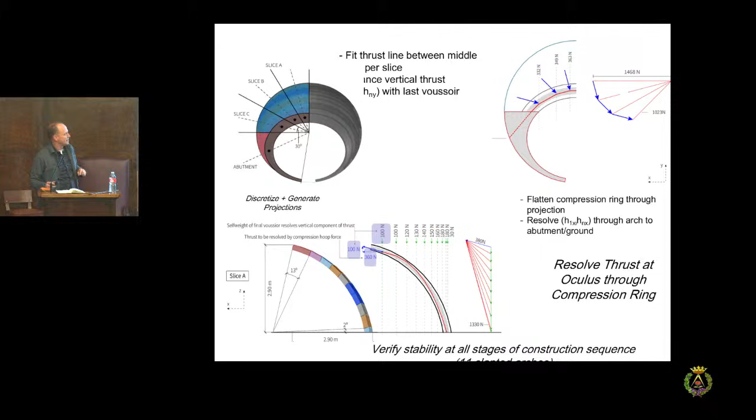So now we take the oculus of the Pantheon and we rotate it and we study equilibrium. How thick do we need to be? We take a series of arches, we resolve those forces in 3D, and this is with several students, including my PhD student Nebu, who's been on the summer school.

And here I show it under construction. We're using kind of a Nubian vault technique where we build up each layer and you're leaning on the other with some small props. And we built this in about one week. So dry stacked, stable vault, equilibrium holds, no tension required.

So that's my brief recent research on three domes, two significant domes and one not so significant, but that we're still playing with three-dimensional forces in equilibrium. Santiago, I hope you've enjoyed something here.

Santiago, I hope you've enjoyed something here. Now, I must embarrass you a little bit.

All of us know what a special scholar Santiago is, but also what a special person he is. He's made a huge impact on my life and so many others. From my work with Santiago, I think we probably now have something like 40 professors who've come after, so you have bisnietos, great-grandchildren of professors all over the world. Your guidance has meant so much. So I've been thinking, what are the 10 teachings of Santiago? This is my tribute, my top 10 list.

I should also say he's come to MIT and seen this small-scale model of Hagia Sophia, and he's been very generous with our students as well.

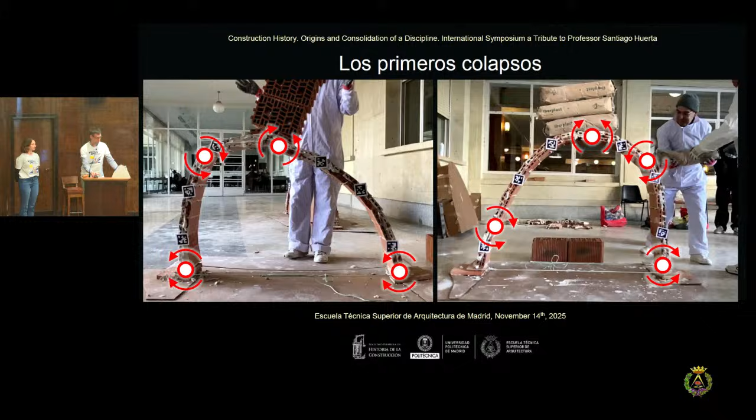A continuación pasamos de la estructura tabicada 2D a la 3D. En este caso, seguimos con la construcción de escaleras tabicadas y aquí ya trabajamos sin cimbra.

Aquí colocamos yeso sobre los cantos de la rasilla y apoyados en un tabique, como podéis ver en la imagen, vamos colocando esas rasillas y, tras sujetarlas en su posición durante unos segundos, si la pasta de yeso está bien hecha, deberían quedarse ahí. De hecho, Santiago siempre dice en tono hiperbólico que si colocamos yeso por los 4 cantos de la rasilla y la dejamos en el aire, esta puede acabar suspendida cuando retiramos la mano.

Aquí también aparece el lema de la asignatura, el verdadero lema, que es Fast and Dirty. Fast significa que tenemos que llevar un ritmo de trabajo rápido para aprovechar la pasta de yeso mientras está fresca, sin que se tenga que desechar. Y Dirty, que no deberíamos poner mucho empeño en el acabado estético de cómo queda esa bóveda.

Cuando las hemos concluido, estas ya son unas bóvedas que realmente resisten. Pero claro, los alumnos, viendo cómo habían funcionado los arcos, no confían demasiado. Entonces, hasta que no es Santiago quien toma la iniciativa y se pone sobre esas bóvedas y los alumnos ven que resiste, ya confían y nos subimos todos encima, e incluso él se pone debajo para asegurar que efectivamente eso no se va a caer.

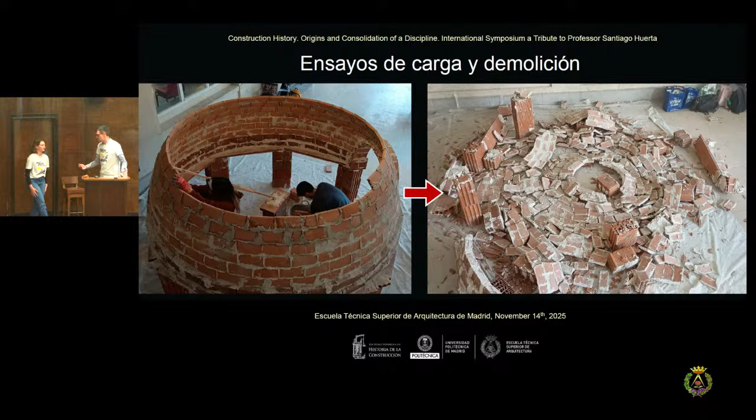Hola, pues yo voy a hablaros un poco de la experiencia como estudiante en este taller, ya que yo fui alumna en la última edición que se hizo en primavera de 2025.

Quiero decir que la jornada comenzaba con una muy favorecedora ropa de trabajo y con la preparación de la pasta de yeso a base de polvo de yeso y una exquisita agua que brotaba de un recóndito grifo en la otra punta del edificio, al que se acudía en peregrinación como premio por llegar puntual a clase. Definitivamente una de las tareas más ambicionadas, seguida de limpiar después de ensuciar.

La preparación de esta misteriosa pasta de yeso era un tema de discusión frecuente entre compañeros y era habitual encontrar clubes de debate en torno a las artesas. Demasiada agua, demasiada poca, remuévelo, no lo remuevas más, pero si no tiene consistencia, pero si ya se está secando, y así sucesivamente. Dar la aprobación final es una responsabilidad muy grande que requiere el consenso del mayor número de testigos posible, demasiado para una sola persona.

Y a continuación tenemos la sofisticada tecnología detrás del levantamiento de tan grandes obras maestras como hemos visto, a saber, cuerda, cúter, cinta métrica y rotuladores Alpino. La marca es importante porque si no, no sale igual.

Aquí tenemos imágenes poniendo en práctica los ancestrales métodos de construcción que nos acompañaron durante el curso. Quizás imperfectos en nuestras manos inexpertas, pero grandes fueron las cosas logradas por esta vía, y nos enseñaron además valiosas lecciones de geometría, como que no todos los puntos de una circunferencia equidistan a un centro, no todos los ángulos rectos miden 90 grados.

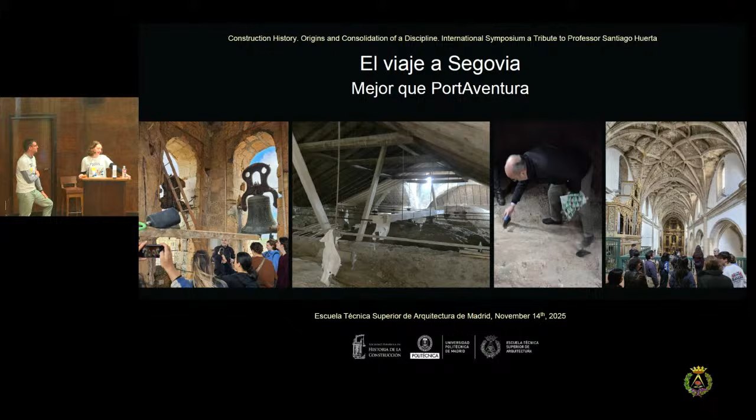Y lo cierto es que es una experiencia muy necesaria para poder comprender cómo funcionan estos edificios y de la que se aprende muchísimo. Además, en esta vida, una no sabe lo vieja que es hasta que no ve lo joven que es Santiago, que va saltando como un lince por esos tirantes con sus cepillos y su mítica bolsa del Corte Inglés, y luego dice que la bóveda tiene un espesor de como 14 centímetros y se pone a saltar encima y la bóveda vibra y la gente grita y es un día especial.

Y llegamos a la aclamada fiesta del escombro, que tantas polémicas genera, y hay aperitivos, Santiago hace sangría, viene gente importante, y nos subimos a nuestras creaciones por última vez, antes de la despedida y la destrucción, de la que Santiago es particularmente entusiasta. Y estas actividades de demolición que vemos en pantalla son la clase que Santiago no permite que nadie más haga, y os dirá que es por vuestra seguridad, pero lo cierto es que nadie se lo pasa tan bien como él haciéndolo, y él lo sabe.

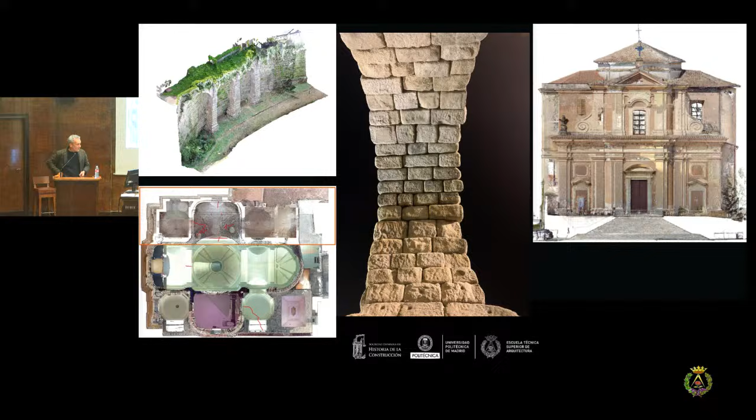The school works with beautiful case studies that are surveyed digitally, and these case studies represent the place where the students work with their hands, measure, and understand the effective shape and geometry of the building, and start from there to make their structural analysis. This requires on-site visits, measuring, understanding the effective characteristics of the buildings, and finally the workshop on tile walls, which has become a very important part of the summer school.

The summer school lasts for 2 weeks, and the starting proponents are outlined here. There is also John Ochsendorf, who always participated in all the editions and provided a wonderful opening lecture, and then Santiago, Maurizio, and also young colleagues like Ignacio, Rosa, and Paola who always participated in the editions of the summer school. From the beginning up to now, we had 164 students from over 22 countries, and we could say that this school is starting to become the reference point of a community that shares the same ideas and feeling about the structural behavior of masonry structures.

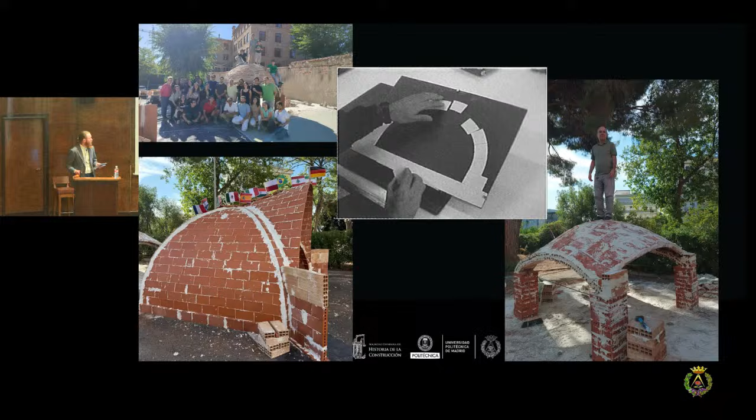Santiago is a no-nonsense researcher. His favorite method of using models is building one for real, whether using cardboard, miniature bricks, or tiles and ashlars. He employs real-world models for his own reasoning, learning from master masons, and sharing his insights into the workings of theoretical concepts, practical constraints, and creative working strategies which have been applied throughout the history of construction.

The tile wall workshop, led by the master masons who are also with us in the celebration today, is a highlight of the Heimas Summer School. It provides many of us the opportunity to get our hands dirty by constructing replicas of real-world vaults. Once the structures are built, we experience the vault's physical response to experimentally induced impact and damage, performed of course by Santiago, with his signature mischievous smile, underscoring with every punch the incredible resilience of such structures.

These memories and situational experiences accompany many of us throughout our professional lives, motivating us to stay involved within the built heritage field, especially when this path is not always an easy one to take. More importantly, they help us define what matters in the assessment of historic masonry, what might be only decorations, and what are merely distractions. Santiago demonstrates, through every engaged discussion, every speedy email reply, and his precious and subtle mentorship, how important it is to him to empower the next generation of professionals.